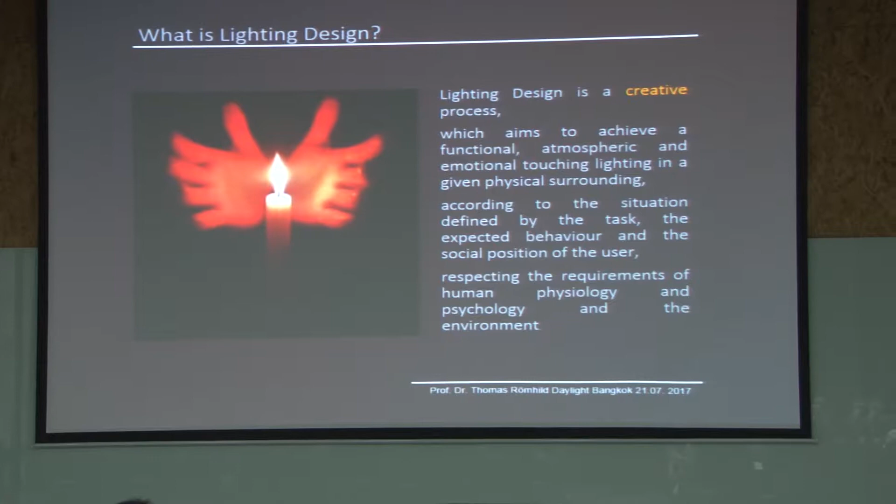Okay, the lighting design process. What is lighting design? It is difficult to find a definition for lighting design. So I was thinking how to do that, and then I typed very quickly some aspects about it. Lighting design is a creative process which aims to achieve a functional, atmospheric and emotionally touching lighting in a given physical surrounding - architecture lighting design - according to the situation defined by the task, the expected behavior and the social position of the user, and respecting the requirements of human physiology and psychology and the environment. So I think this shows the complexity of lighting design.

It's not a simple thing you can add in the architectural design process in a small slot between planning and realization. It is something which should go through the whole planning process. The lighting design is something which covers, as architecture, all the scales of the design process.

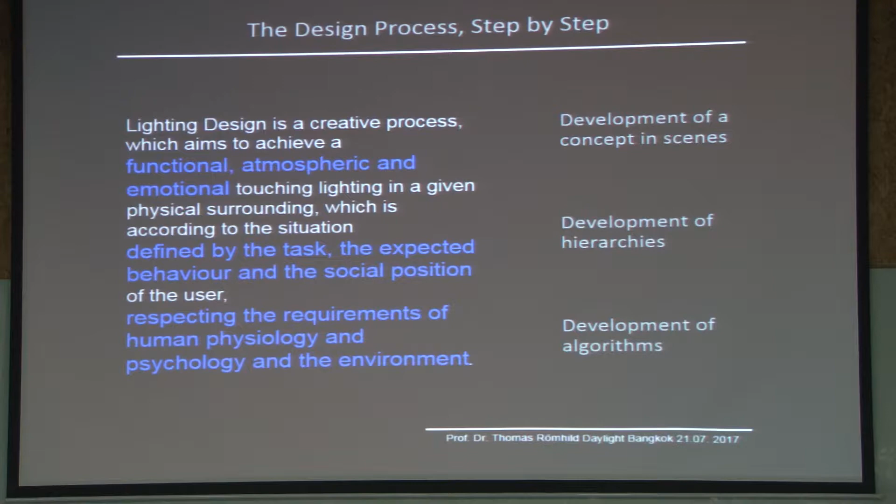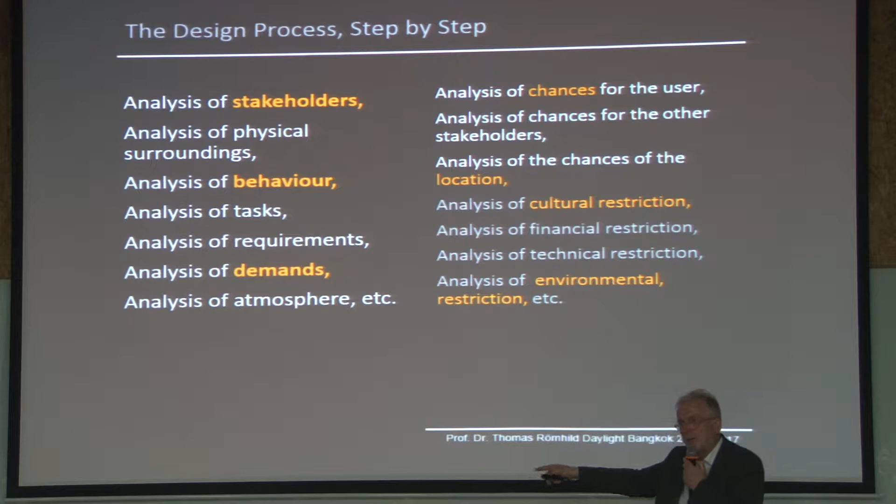We are doing this work, and that's why Professor Archer asked me to start with this. We are doing these thoughts in a European research project called Dynamic Light, where we are trying to find out how the lighting design process could be structured, so that lighting designers could develop dynamic, changing situations, also for the public. For the interior, we know it in a way like we have done here, by switching off the light in front and leaving it on at the end. But in the exterior, in public space, you can't do it. You can't go out and switch off, then come and switch on your street lighting. This is, I think, only possible in very few situations.

So we are trying to develop a process for lighting designers to develop this, and also for the cities, for the responsible persons, to find a way to describe which requirements the lighting designers will have to fulfill. Therefore, we were talking about a long list of analyses that should be done for every lighting design concept.

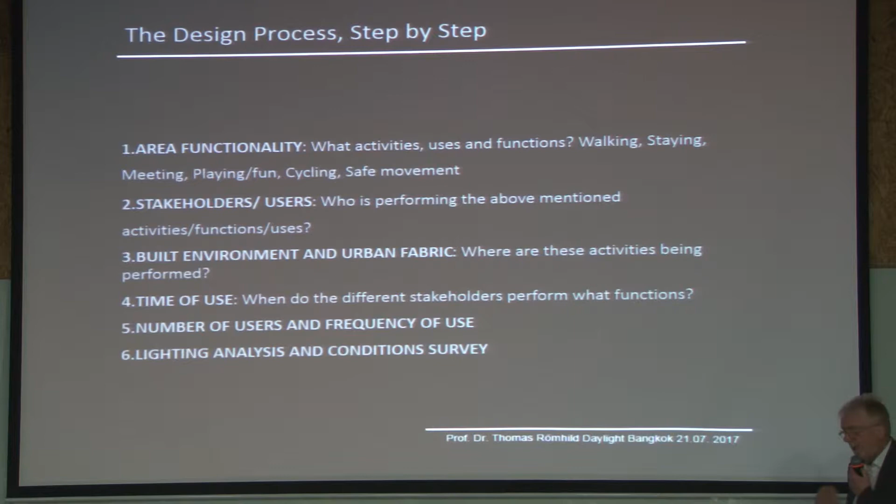And for making this analysis, you need data. For this data, we developed a monitoring tool. These are the main questions you have to ask if you are trying to develop a dynamic concept for public lighting. Working on this made me think it could also be good to develop a process for lighting design in general, because lighting design is different from architecture design.

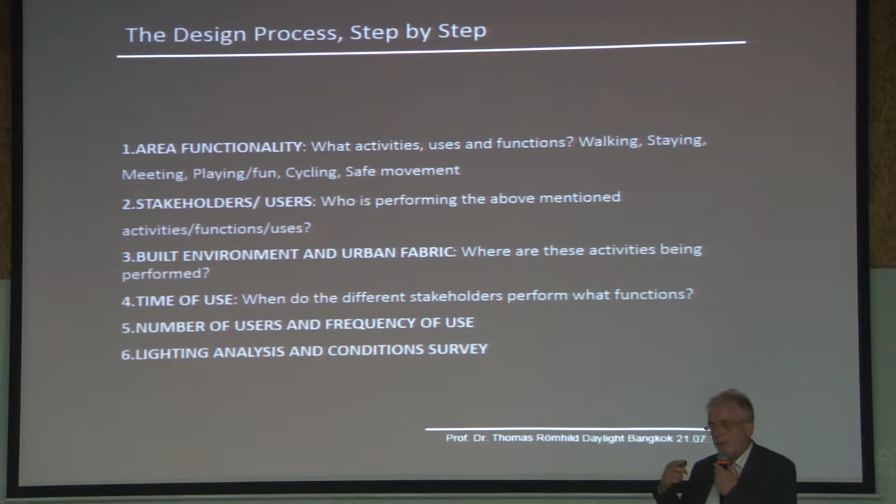As I said to the students a few minutes before, if you are designing architecture, you are designing something which is there. So you are designing a construction where you have to think that it is not falling down, and then this construction can wait till the users are coming.

If you are designing light, it is something that has to be consumed immediately, because light which is not perceived, not seen, is not existing. It is gone, it is wasted. So if you are lighting up an empty room, the light is there, it costs energy, but it is not seen, so it is not reality, because light has to be consumed immediately.

So it is better to have a room which is not used, not lit, than having light which is not used, which is also not waiting for a user, which is only there randomly.

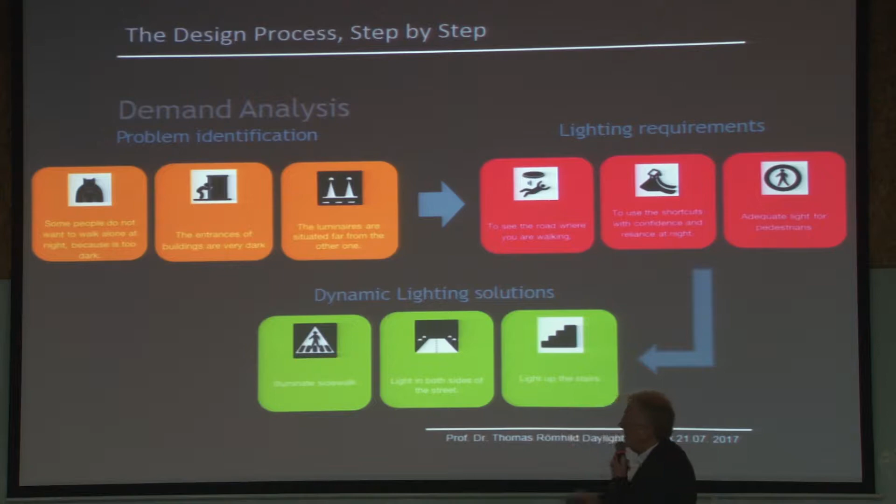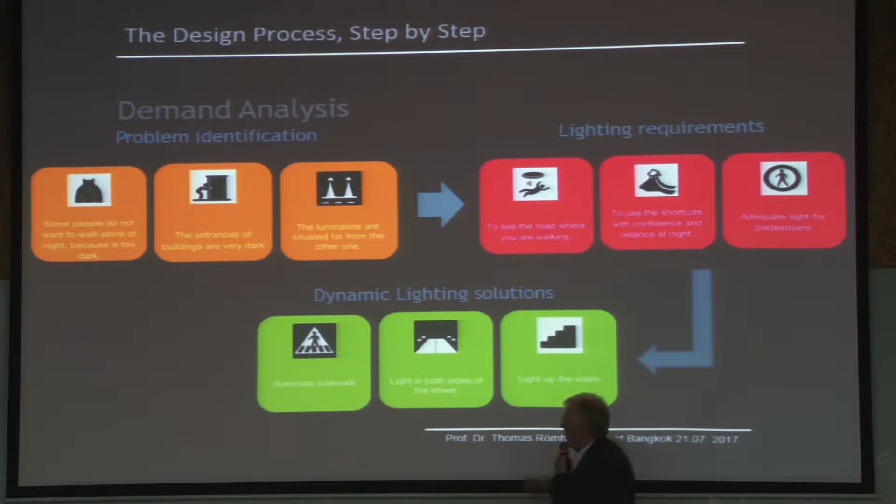For that you have to look very closely at what people are doing and what they expect from this scenery. For example, some people do not want to walk alone at night because it's too dark, so we have to develop a solution where we can see the road where people are walking so they don't fall. Therefore we need, for example, light on both sides of the street or an illuminated sidewalk, so we have a clear way of monitoring the situation, understanding what the stakeholders are doing, finding out the requirements, and in the end finding the light solution.

So this is where we are now, and we are continuing to develop this in our research project so that it is more simple, more handleable later on. Right now it's a little complex and complicated, and we're trying to make it more simple and understandable, so that a lighting designer and also the authorities have a platform to talk and understand each other.

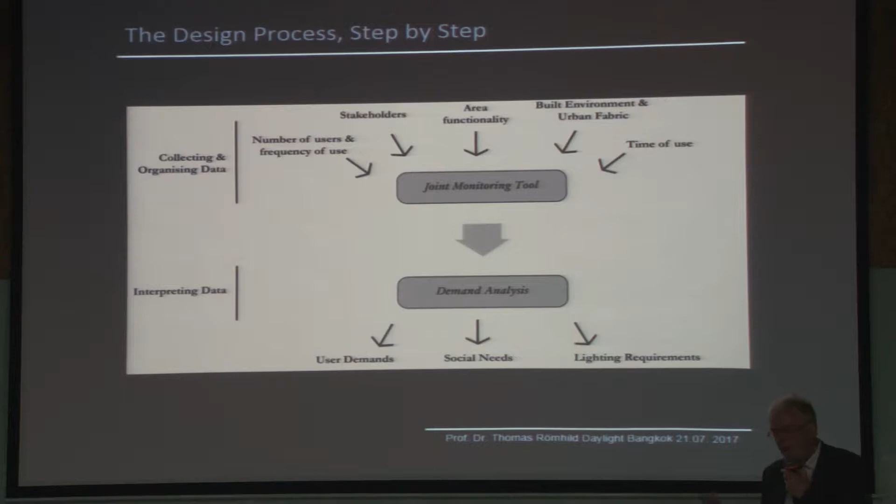Because we feel that this doesn't exist yet, and it's needed for complex design tasks like dynamic lighting. If you have different lighting moods you want to create, you also have to think about the reasons to change them, the algorithm.

Now let's come to daylight. Having this long starting period in mind about the design process, what does it mean also for daylight? Daylight is fantastic. Daylight is something which is changing, which is everywhere in a different situation.

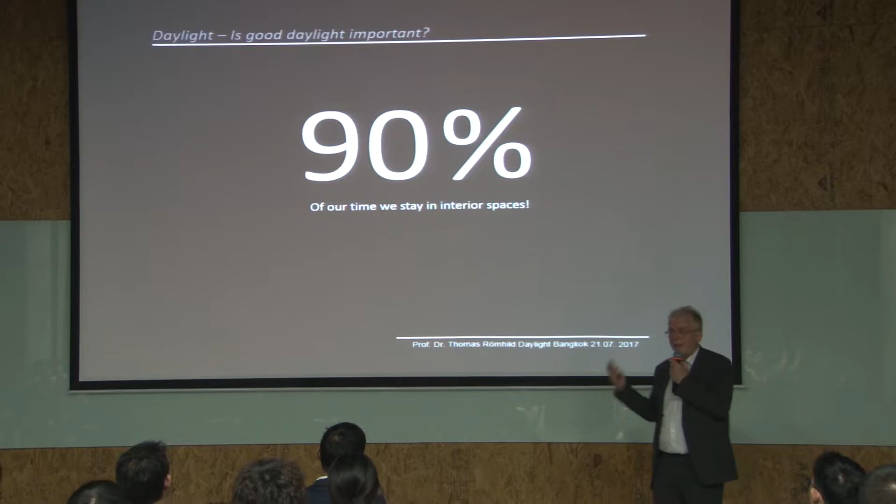80% of our perception is visual. 90% of our time we stay inside a room. What does that mean? If we are designing the lighting for a room, daylight is very important, because mainly we are inside, and if we want to use the daylight - and we will come to the reasons why - then it is needed to do this also for interiors.

So a good interior design does not mean only artificial lighting design. Good lighting design for interiors automatically means also a good daylight design. If we leave it to the architects, very often the solution is driven by the form of the facade, but it does not respect the differentiated, changing daylight. It also does not respect the physics that daylight has.

And so I will go a little bit through these things which might not be new for you, but maybe it is inspiring to get it all together.

Daylight is changing everywhere, every minute, every second, and it is so different. You have direct sun, you have diffuse sky, and with daylight, a good daylight design, you can make the architecture alive. The design of space is the design of light, meaning the design of daylight mainly.

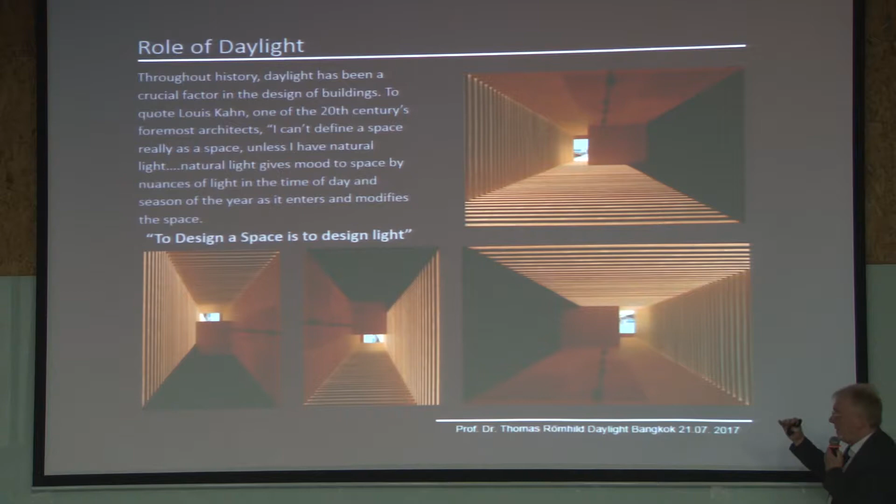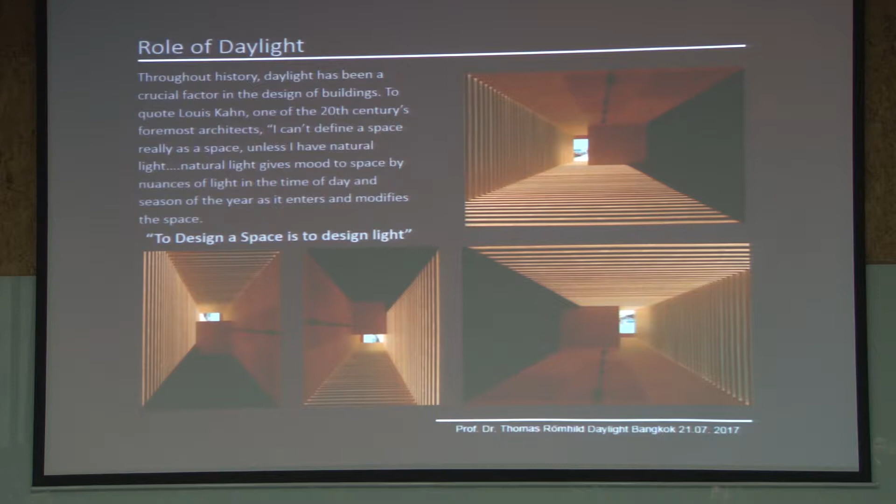And if you look at these pictures, you've already seen it's the same picture every time. But thinking about where the light is coming from gives you a different illusion every time of how the room is meant - what is floor, what is ceiling, whether it's an artificial light direction or a direction coming from natural daylight.

So for designing daylight, we also have to understand the design process, and we have a similar design process as I mentioned already. Here we also have in the beginning the monitoring, the degree of daylight utilization - what is given from the architecture, what can we do? And then we have the demand analysis - we look at what daylight is needed and how we could combine what is given with what is needed.

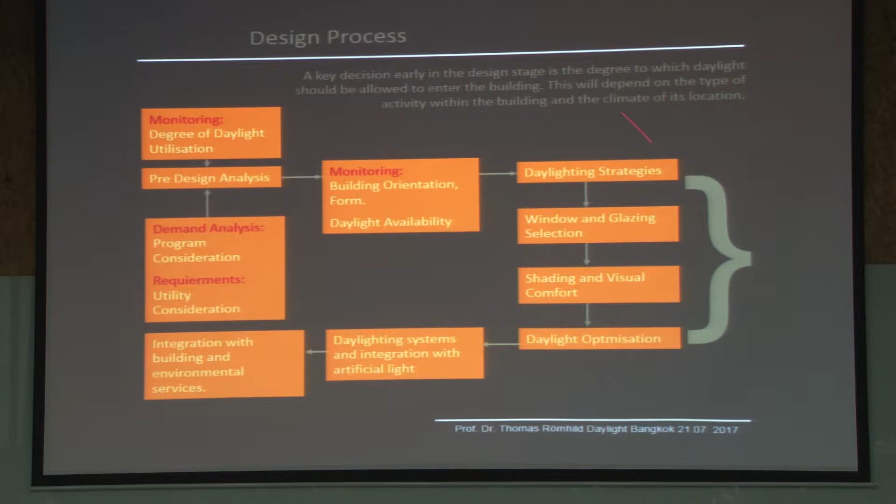And there is the pre-design for the daylight. Then we look more in detail at the building orientation, the form of the building, the daylight availability, and then we put all this together developing a strategy, deciding about windows and glazing, shading and visual comfort, and then we optimize and go back to the daylight systems if needed, integrating all this into the building service or the building itself.

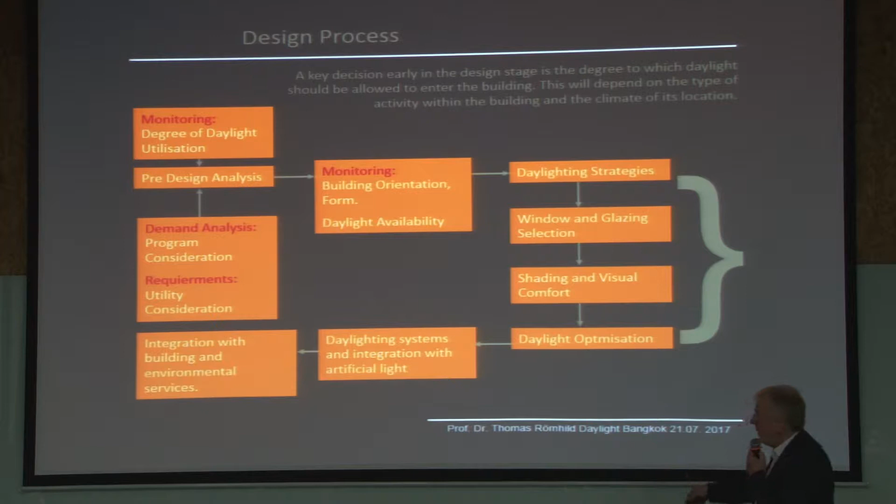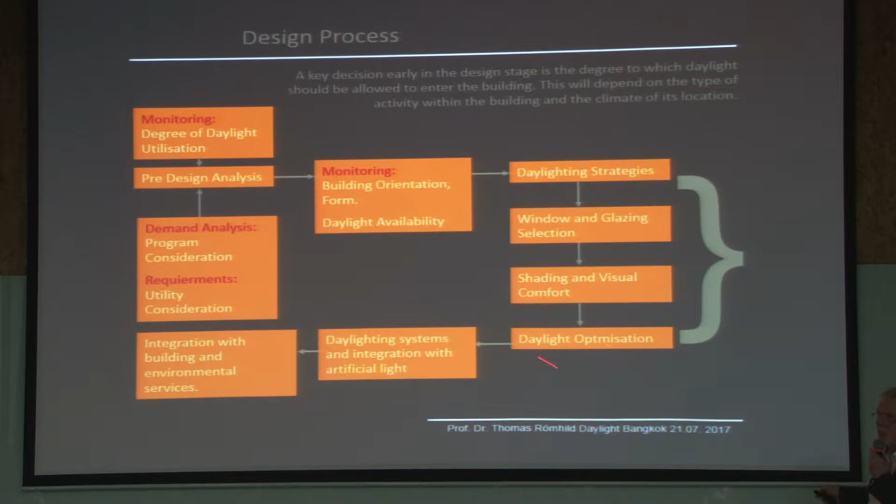So it is a long way, this daylight design, and as you can see, normally it's somewhere here that you have given windows, not selected windows. You may give a comment on the glazing, and then you have problems, and then you can decide about the shading systems maybe, and how this could be integrated into a developed artificial light concept.

I think it is needed to start at the real beginning if you're talking about daylight, during the whole process of architecture development, and we should think about what the end will be. The end will be a comfortable atmosphere with low energy costs.

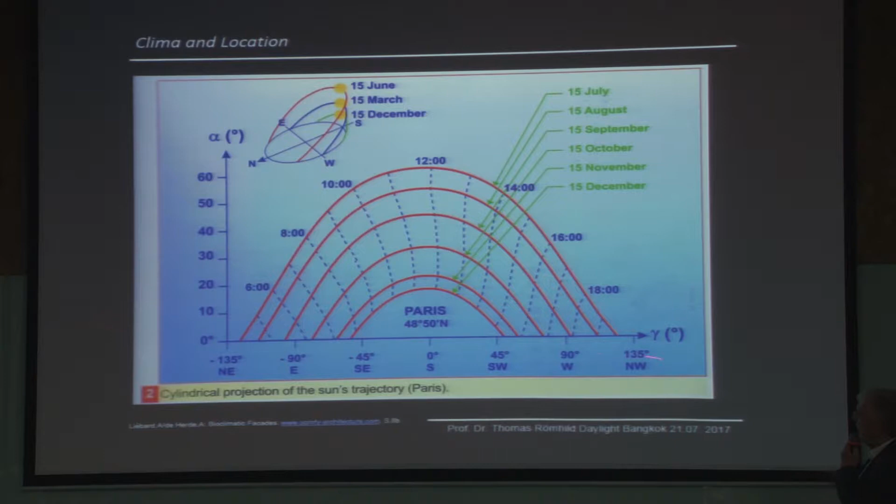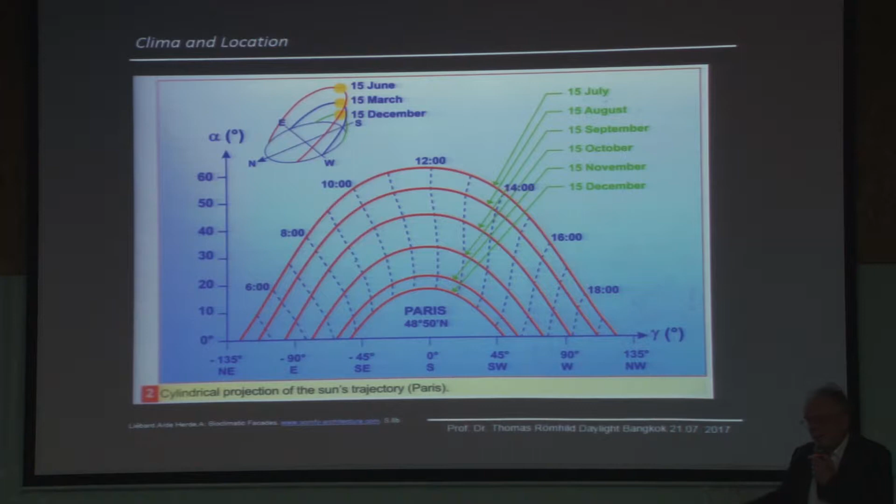of the city or situation where you want to talk about, and then you can see the month lines and the hour lines, and you can find the exact sun position, talking about the azimuth and altitude. I think this is an easy thing, and if you know that daylighting and sun position is something so easy, then it is also easy to respect it when planning a building, as you are also respecting the width of the area where you are doing the building.

This very simple form, this very simple connection, brings so many different results that it is possible, if you have an open eye for the beauty of daylight, to find everywhere, every time, new signs of this beautiful thing.

And to get this information, which is given by the natural light, into a building - I think this is a task, because daylight gives us unconsciously the security about our physical surroundings. Daylight tells us what the weather is, what the season is, what the location is, what time of day it is.

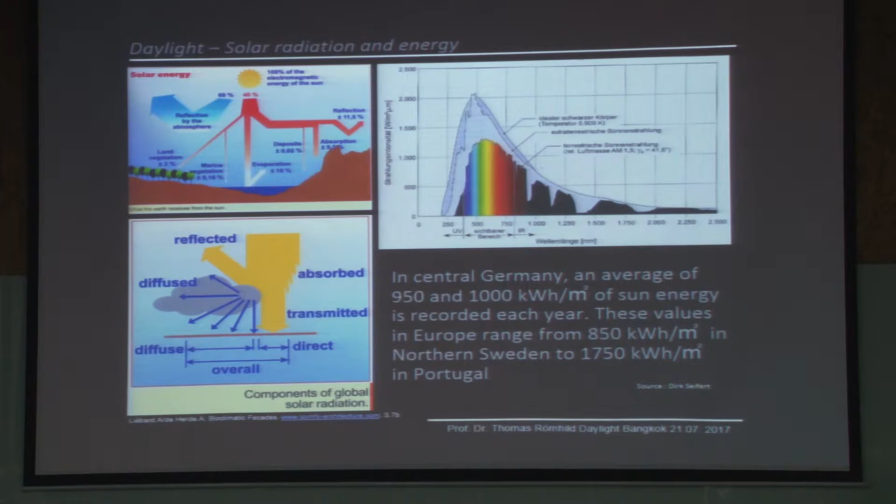But daylight is not a simple thing. Daylight causes problems too. We all know that daylight, as it comes to the Earth, is filtered, and only part of the daylight reaches the Earth. All of this brings energy to the Earth, and this is absorbed, this is reflected, and if it is absorbed inside the building, then it is heating up the building.

I think this is a very common thing here in Bangkok - you know that if you have a big window and a lot of sunlight or daylight coming in, it heats up because it's energy when absorbed. So you can see it here - this is the energy, not luxes or something lighting designers talk about. This is the energy in watts per square meter in the daylight, shown here according to frequencies, according to the spectral aspects.

And you can see the visible part, shown here colorfully. This visible part is as big as, or bigger than, the part which is not visible. So if we let the visible light in and the infrared light is not coming through the glass, or is reduced coming through the glass, then we will still have an energy problem. So if we have glass that reduces both the visible part and the infrared part, it might be best - but why is the window so big? These are questions we will think about further on.

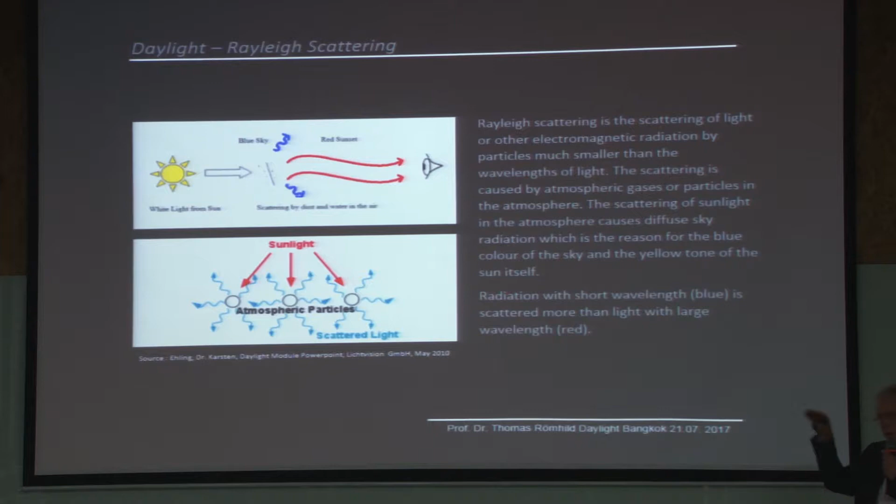In the sky there are a lot of very small particles, and these particles are scattering the daylight. Because they are so small, they scatter only the blue wavelengths, and that's why the sky is blue. When there is a cloud, the particles are bigger, and they scatter a bigger part of the spectrum, so the clouds appear white.

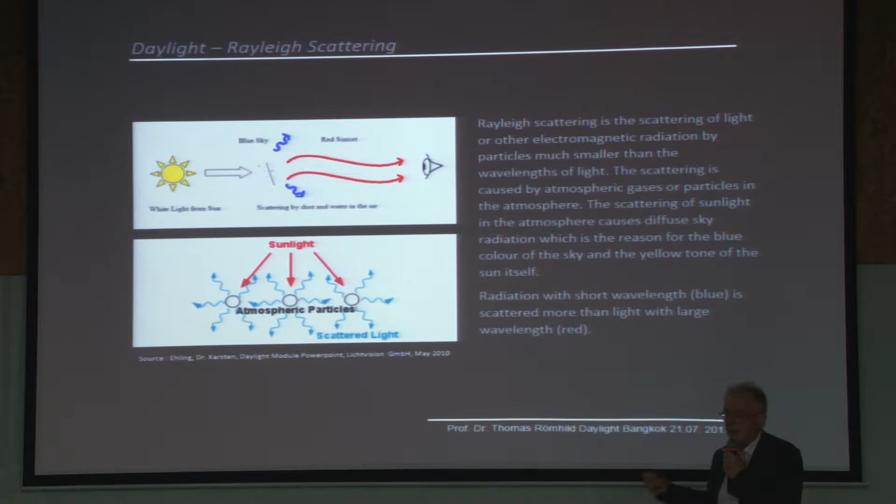So it is a very easy thing, but it is also interesting to know, because this is producing the information that we are reading to understand our surroundings.

Because if the sun is very low, the way of the light through the atmosphere is longer, and also the particles it passes are more numerous, so the red light comes through while the blue light, and maybe the rest of the spectrum, is absorbed. This makes a difference to what I said before.

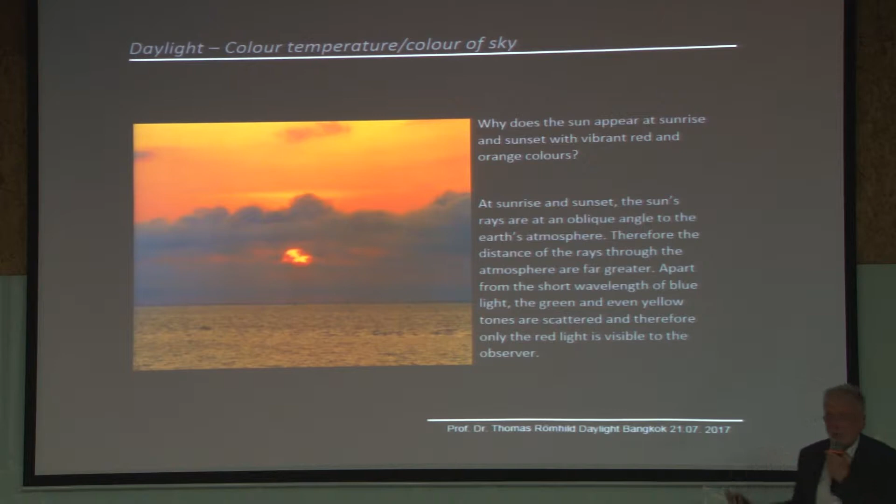If the sky is blue, it's because some of the blue parts are scattered and the rest is going through, so we have the full spectrum with a little bit less blue—but blue, as we have seen before, is a lot in the natural light.

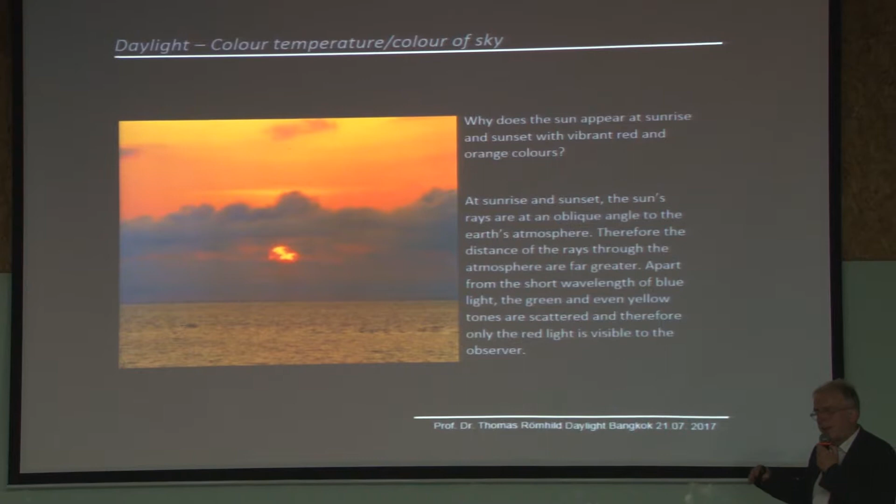So we have all the white light, the full spectrum, coming down. But in the evening, the blue light and the green light are absorbed by the atmosphere, so this sunlight is really red.

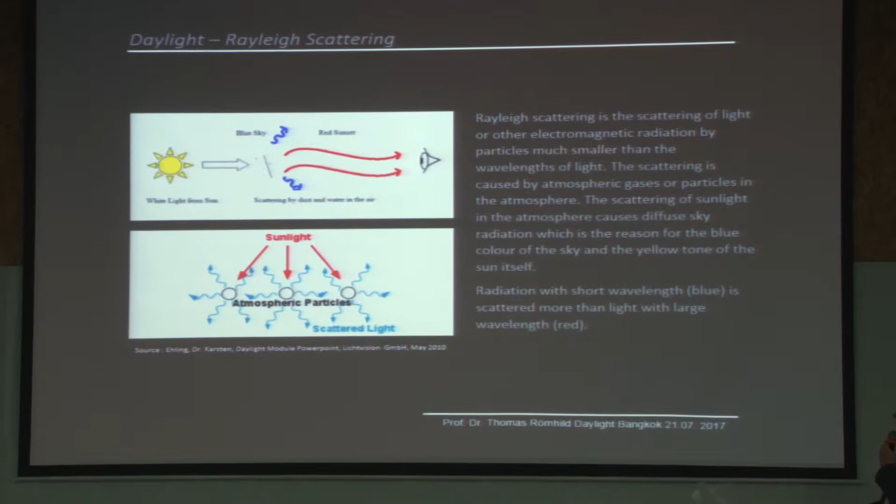We saw it in the reflection on the sand we looked at before. The yellowish part, the orange part—there the blue parts of the light are already absorbed. You can see this here with the blue light first, and then with the red sunset in the picture above.

This was the wrong direction, that's why I was talking about the same slide again. So this red light is really red light, and everything looks much more reddish than by day.

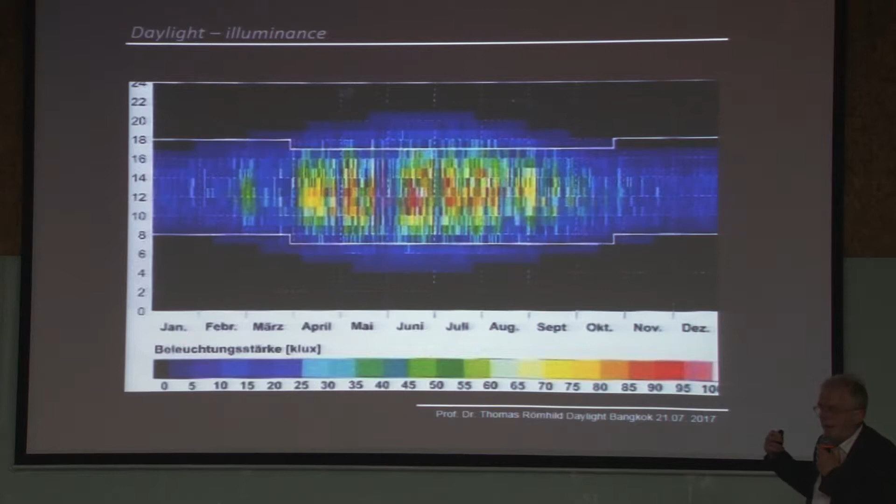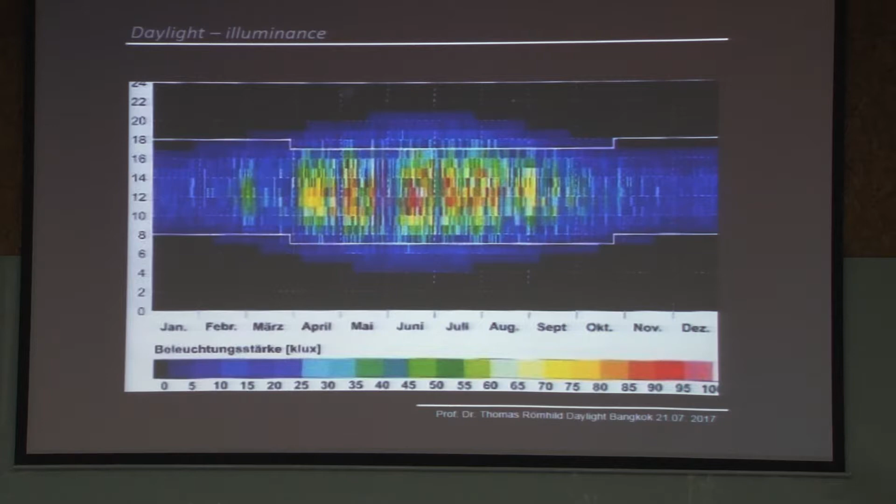But what does this differentiated light distribution mean for us? It means that if we want daylight in a room to be somehow stable, like artificial light is, we need a system that controls the daylight, taking away more when it's very bright—because of direct sun, a different month, or noontime. Many different lux levels come into the room, and if we want stability, we have to make changes with shading systems or window systems.

This chapter is about physiology and psychology, and it will be a short one because I don't want to talk in front of lighting designers about the seeing process. I'll only mention two things because they're important. One is that the luminances and illuminances we find outside are incredibly high.

What we think is bright and what we think is less bright has something to do with where it is. Is it a light inside? Is it the direct sun, which we shouldn't look at? Is it a cloud, which has about 8,000 candela per square meter? Or is it the sun itself, which is something like 1,000 million candela per square meter?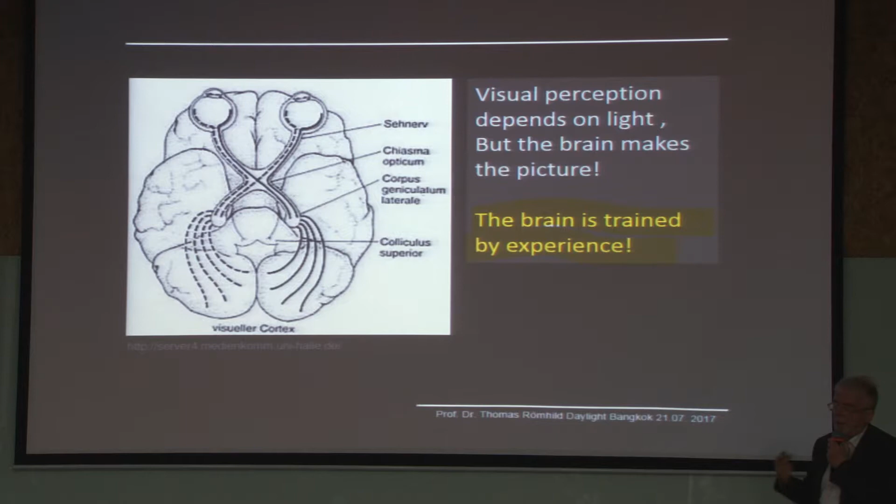The other point is that we've learned how daylight behaves—so we all know daylight in the evening is orange, but we don't really see the orange. We might notice it in the first moment when we come outside, but after a while it's gone. This is called constancy of perception, and it's important if we're trying to work with the beauty of daylight and develop it. But it's also important that we respect the natural way nature treats daylight, which is why I'm talking so much about it.

What we remember from a situation is also very much inspired by what we see—by, let's say, the postcard view. So something we've seen as important and nice, we will also see and remember as important and nice. And then there's another process mainly inspired or driven by daylight.

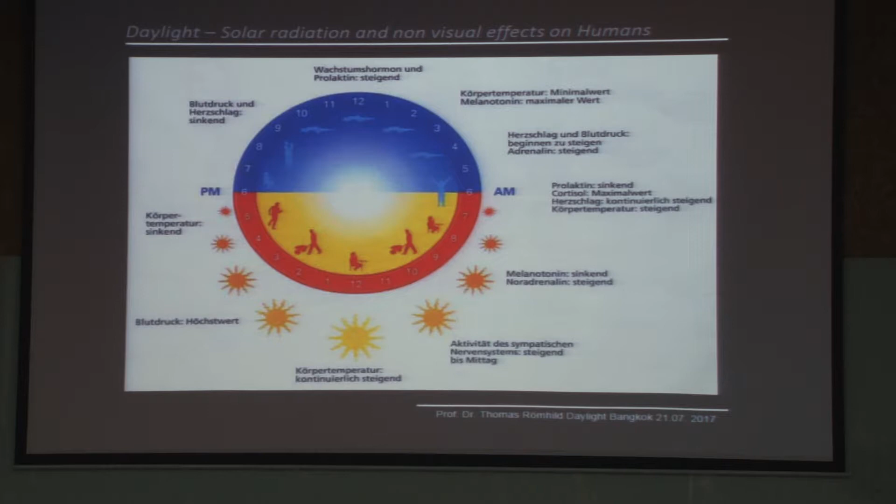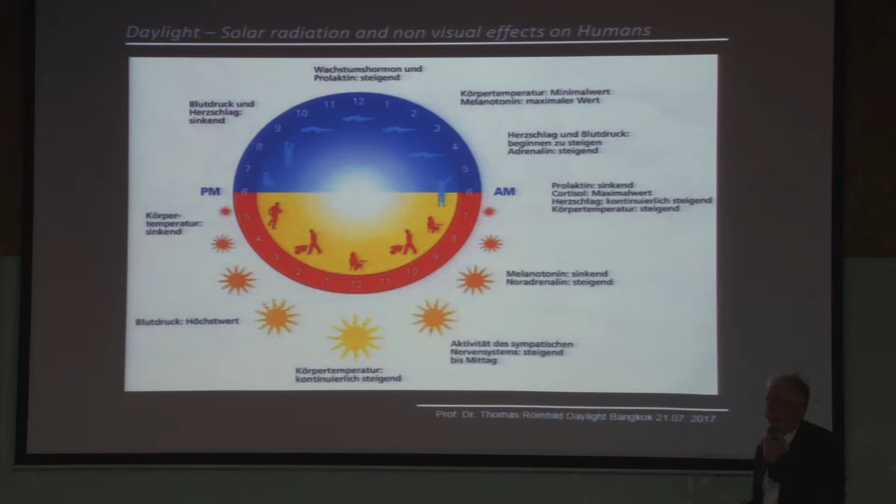This is our internal clock, and we know the internal clock is run by blue wavelengths. The body is regulated by the sun, and this is also done by daylight. If we have no daylight, our biological clock doesn't work properly. Science says we need about half an hour a day of bright daylight for it to work in a healthy way.

But daylight also has a cultural background—it affects the way we perceive situations and how we act. So daylight is also guiding how we act toward other people. And for daylight, the main principle is the principle of control and self-control.

I don't want to go further on this aspect. It will be another lecture, but if you are interested, this is something we can talk about later.

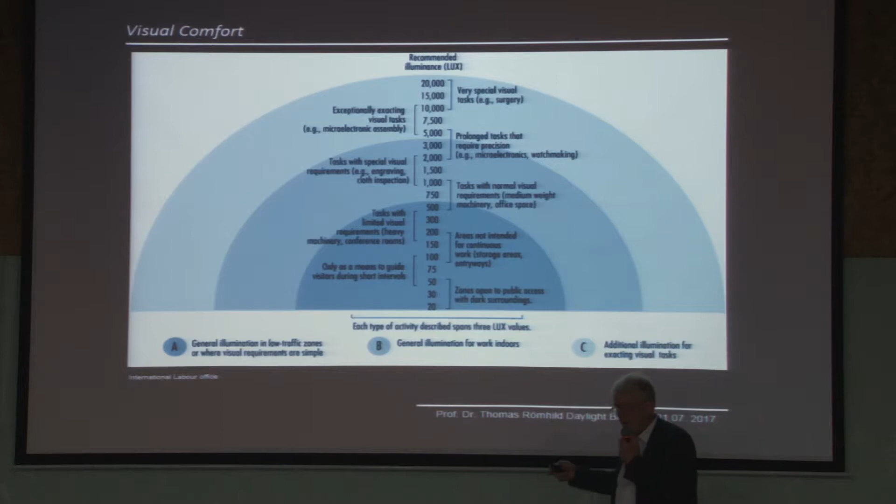Learning from the indoor climate and human comfort, first visual comfort. I don't want to talk so much about this because visual comfort in a room is described for artificial light. For daylight, it is mainly that we say it should be glare-free, meaning the luminance differences are not so high. So we should have a daylight distribution in a room which is more even, and there are not hot spots like direct sun shining in, so you can't see anything anymore.

I'll come a little bit to another point: thermal comfort, because thermal comfort is also depending on the daylight. We want to have a temperature of 36.7 degrees, and we have a lot of possibilities to make it possible that this temperature is the real one we want to have.

It is not only that we have air conditioning in a room, it is also that we have a lot of self-regulating systems in our body. But the sensation of heat, which is important for daylighting, depends not only on air temperature but also on surface temperature. If we have a cold surface, we feel that the whole situation, including the air temperature, is lower. If we have a warm surface, we feel that it is warmer.

In our country, we like to have a warm surface because we want to feel warmer. But how does this happen? The sun is shining directly on a wall and warming it up, or shining directly on the floor and warming it up. Here in this country, it might be much better to lead the sun or daylight into the room in a way that direct sunlight is not warming up a surface, and that the glass is not warming up because it's single glass with bronze color, which warms up a lot because it absorbs a lot of heat. You should think about possibilities to keep the surfaces cool, whereas in winter times we like surfaces which are warm, so we like it if the sun is coming deeply into the room.

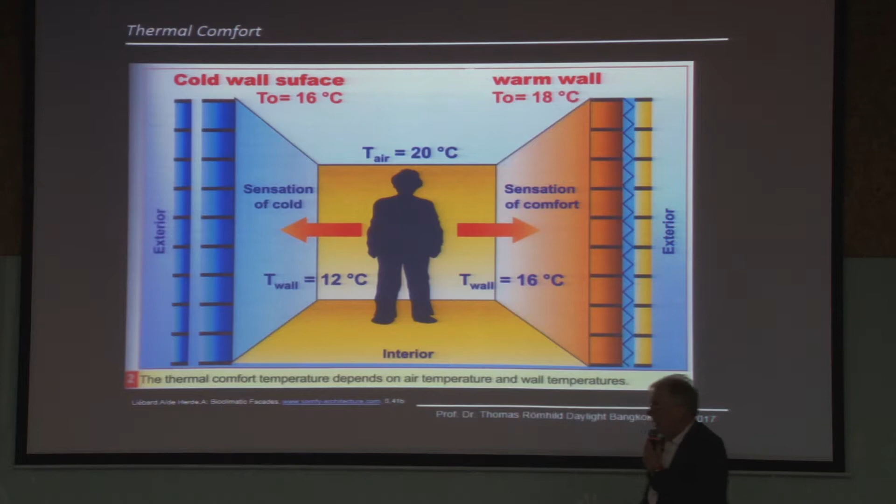So temperatures are really differentiated. Not everyone needs the same temperature. It is a very personal thing. So it makes no sense to have a fixed temperature. It is something where you have to have a dialogue with the people who are using the room.

Short cut. Now we were talking about the humans. Now we are talking about the building. How daylight comes into the building is defined by the daylight factor. I think you all know it. The daylight factor is something where you can compare different buildings, different rooms, according to how much light is coming into the room. So it's a percentage of the outdoor and indoor lighting.

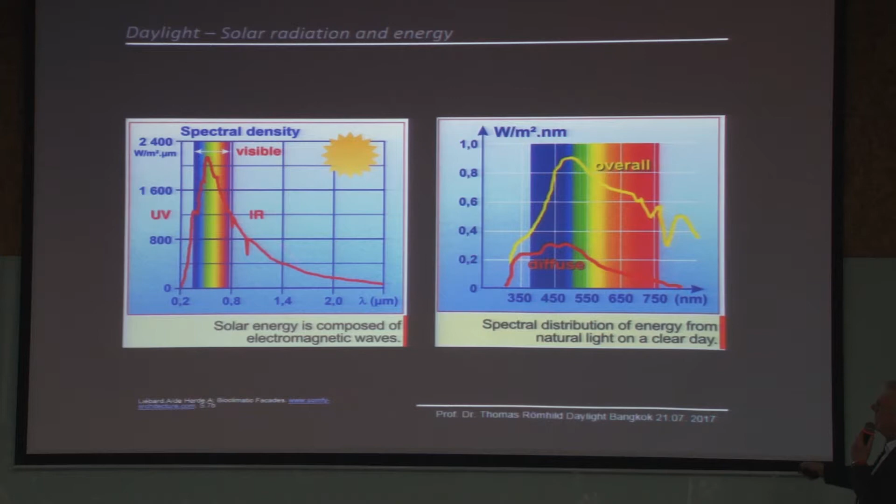This can be calculated, and there are a lot of factors which influence that. For us, interesting should be only the glazing, because if you look first at the windows and the light coming in, you can see again what I have already talked about, that there is a lot of energy, and here you can also see what I have already shown, that the diffuse sky has less energy and the direct sunlight is very powerful.

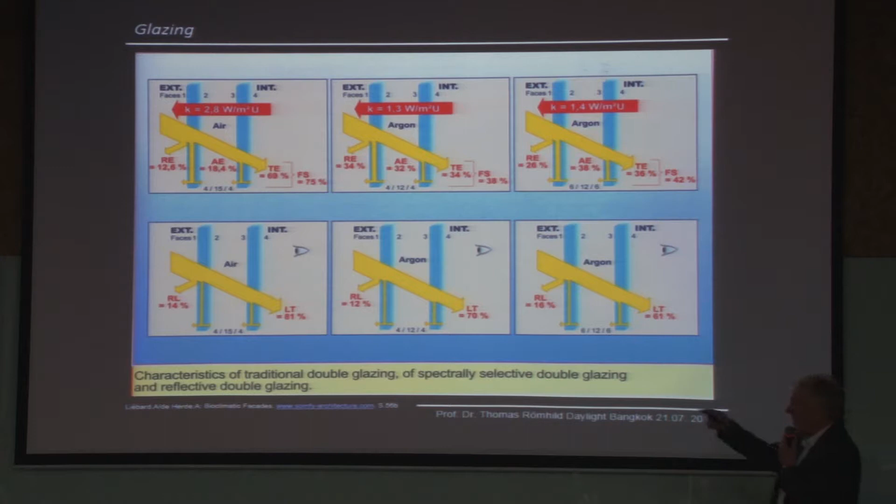Then let's come to the glazing. The glazing has different abilities, and what is interesting, as you all know, is that energy and light going through is reduced, and so on. If you have a single glazing, you would have a warming up of this glass, because it is absorbing the light, not only reflecting it, and the rest is going through. If you have a double glazing, you have this system twice, and this reduced energy, this reduced light is again a little bit absorbed, and it is warming up the glass.

If you have now a selective glass, it depends on the quality of the glass. It happens that the visible energy can go through, and the not-visible infrared energy can stay outside if it is a good glass. But it is not only reflected, it is also absorbed.

So it can happen if you're using reflective glass, especially only single glazing, which you can see more often here in Thailand, that you get a heater in your room because you get a hot glass. And the hot glass works like a heater, heated up by the absorbed energy. So the heat does not stay outside if you have a glass which is more absorbing the energy than reflecting it.

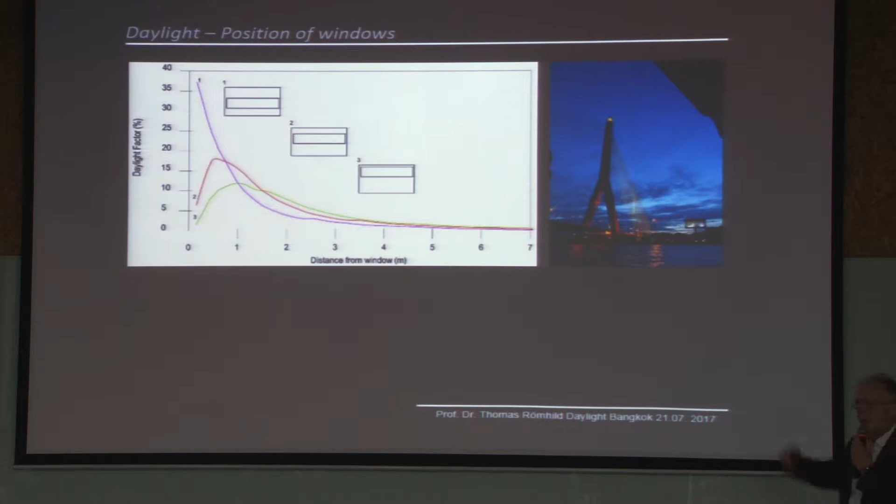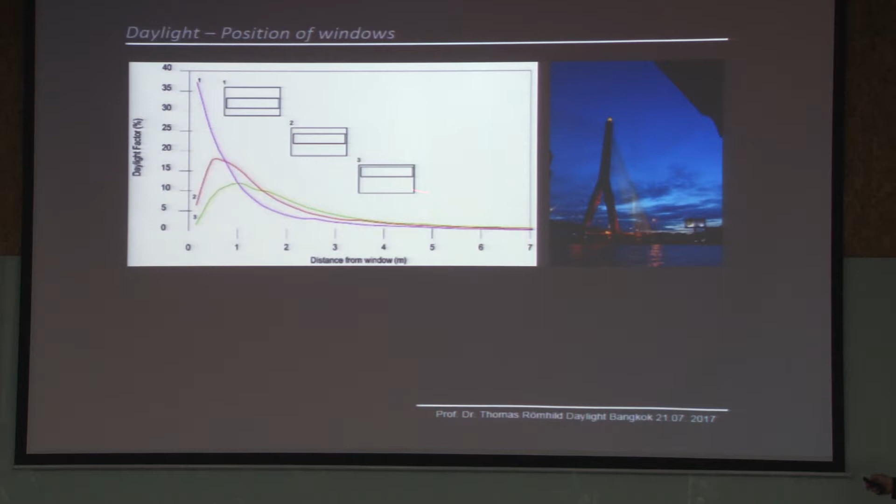Another thing which is important for the quality of daylighting is how deep the daylight is coming into a room, and therefore it is important where the window is. A simple rule: the higher the window is, the better the daylight distribution in the room. But if the window is very high, you have a problem that you can't look out and see the beauty of the city. So I think the best is a combination, having a smaller part to look out and a wider part for getting light into the room.

Why I'm talking about the width and dimension of the window - I made this picture and measurements in my hotel room now, preparing this lecture. I found that if there was only a little bit of the window open, less than 10 centimeters, I already had, at 2 meters distance, 50 lux. And this 10 centimeters, it's diffuse sky outside, not very bright.

These 10 centimeters are enough to light up the room in a way that I was happy with, so only a little bit of energy is coming into the room. If I have it nearly 80 centimeters open, then it is 300 lux at 2 meters distance, and this is enough for having a working area. So you can work in this room with just this small slit of light, and low energy is coming in.

If I'm opening the window nearly half, it is already 1000 lux. And if it is really open, it is 2000 lux. And now it's a hotel room - the whole day the window is open like that, because the service opens it, and the heat is coming in.

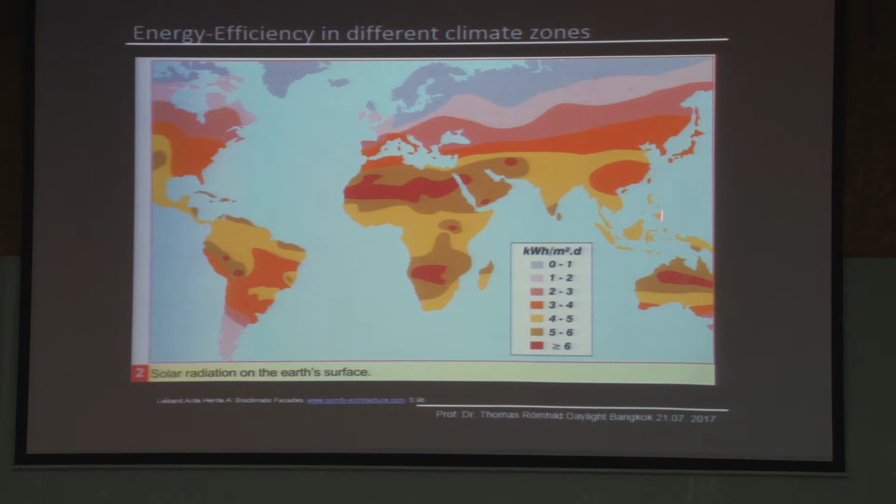Here is the Baltic Sea. It is not so much. We are happy in summer, and in winter it is cold. And where we are here, it is also not the hottest area, but it is really hot.

So also the sun path is different, which makes it more difficult to deal with the sunlight in the northern part, because the sun position is changing a lot from north to south, northwest, northeast to south, and the sun height is also changing a lot. So we have times of the year where the sun is very low, and times of the year where the sun is higher.

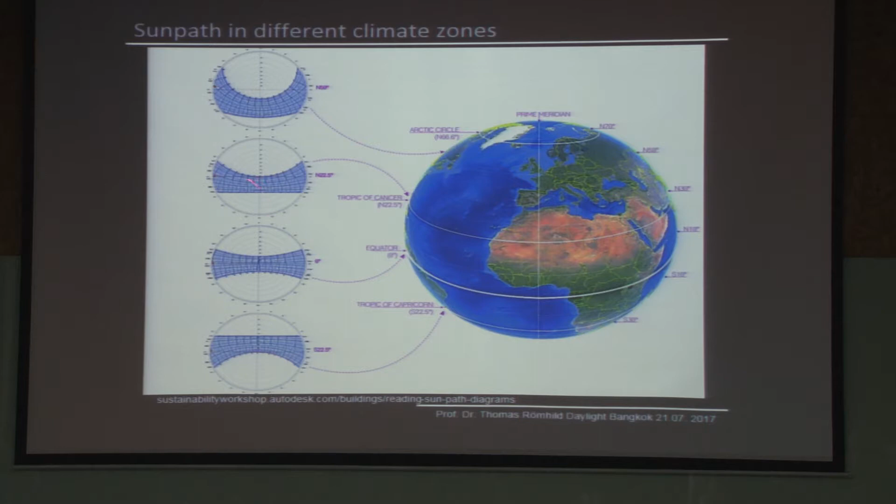And we have it here. I think these are all well-known things, how this works.

If we are now talking about high-rise buildings, this is one in Bangkok as an example. The difference is that in Bangkok, every evening it is nearly the same time when it's getting dark, and every morning it's nearly the same time when it's getting bright.

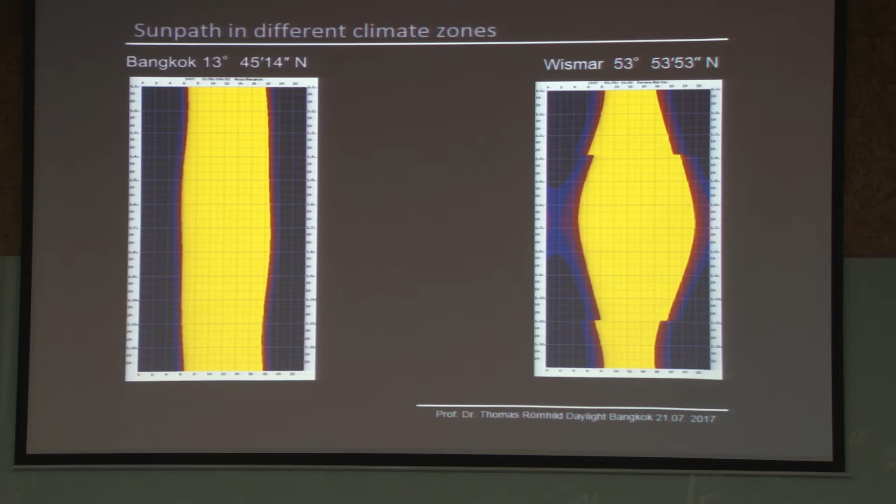And here in Wismar we have a big difference. In summer it is more or less bright the whole night, and in winter there's only a short period of daylight. This has something to do with the time where daylight could be sufficient.

In our region, 80% of the annual working time we can work by daylight, and 20% we need artificial light. Here in Bangkok it might be easier. You have rush hours, you want to meet the rush hours, but if you are going in the morning to work and coming back in the evening, you have more or less the whole time the chance to use the daylight.

This means, if this is research recently done by a research team in the Netherlands, it's a calculation, not a measurement, they calculated the same buildings in three different positions: Amsterdam, because it's the Netherlands, Sydney, and Singapore.

You can see the interior lighting needed in Singapore is only 5%, because they know exactly when it is dark and when it is light in the morning. In Sydney it is a little bit more, 9%, and in Amsterdam, which is in the north with these high differences in day length, it is 11%.

You can also see a little bit of heating is needed, but also a lot of cooling, because there is a lot of internal warmth. In Sydney and Singapore you have no heating, but you have cooling, and in Singapore it's the most. So nothing astonishing.

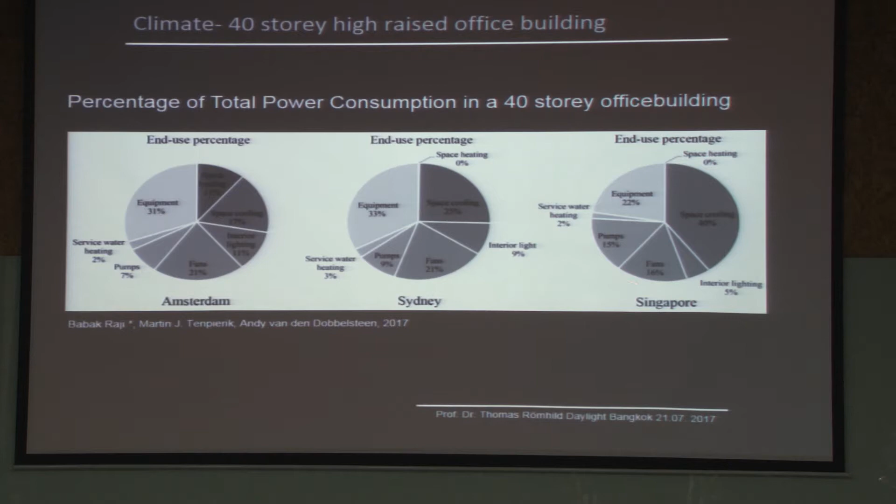If it comes to building type, normally you'd say the building with the lowest outer walls, or smallest facade, has the smallest possibility that warmth or cold air, or energy, could leave or enter the building. So a round building is marked as the one which seems to have an ideal form.

But they calculated that in Amsterdam it would be better to have an oval building, because this oval building could be better oriented in a direction that makes better use of the sun.

And then you can see the different buildings, and the worst building is the one which is very often used in Europe for high-rise buildings, this form, because it allows a smart stair system.

And then you have the same analysis for Sydney. You see some small differences, but it's more or less the same, just in the other direction because it's on the southern hemisphere. Here's Singapore again in that direction. You can see first changes, but the energy consumption depends a lot on the form of the building.

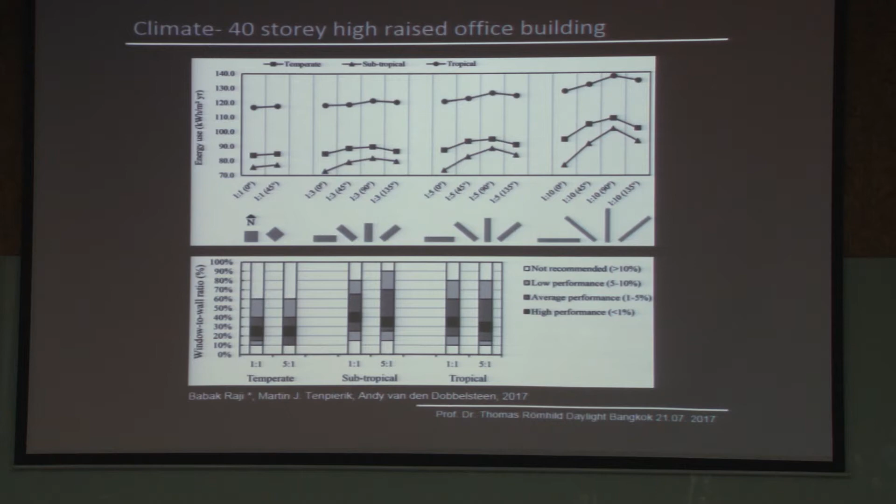In the tropical region, but we never have, it is not recommended, what we can very often see, an 80 to 90% wall-window ratio. So what we are doing really is building too big windows. We don't need so much daylight, we don't need so much energy in a room.

Here you can see it according to the different directions, and the deep plan, this is the squared building you see in the temperate region. There is not such a big difference, but east and west is not so recommended, it is doubling the energy use.

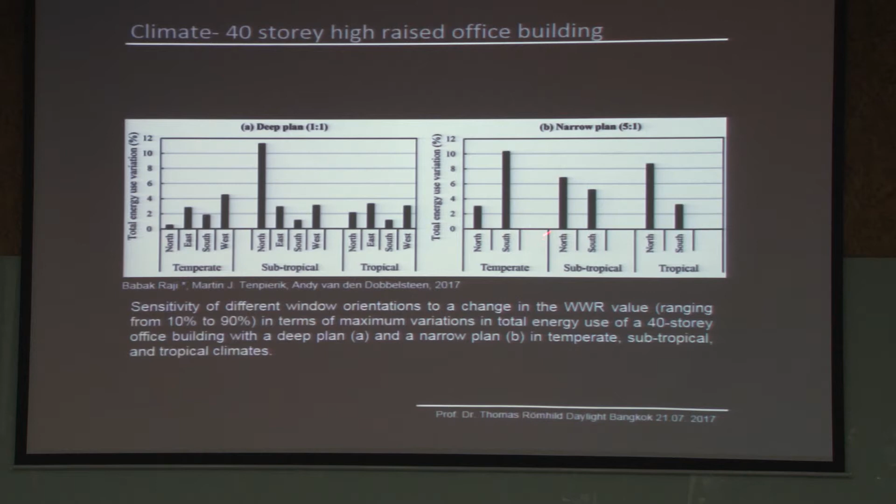In the subtropical, if you have windows to the north, it's a problem, because the sun is coming in really, and in the tropical there's also a difference. If it is oriented to the south, it is the best, and if oriented east-west, it is not so good. For the narrow plan building, you have really big differences depending on direction, north or south, in every region. In the subtropical, a little bit less than in the tropical.

What does this mean? In a temperate region, to the east and west, no or very low glazing is useful. Most glazing should be average to the south, and a big window, no - it depends, it doesn't really matter what it will be to the north.

Coming to the tropical region, again no glazing to the east and west, and to the south 10 to 55%, and to the north 10 to 35%. So it is a really low part of the facade which should be glazed to have a recommended wall-window ratio for low energy consumption. This is somehow a worldwide summary of what I said.

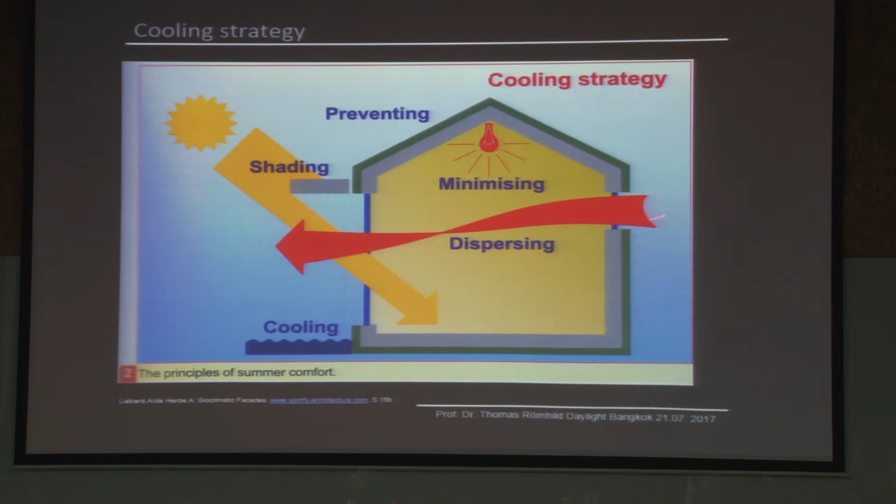The cooling strategy is minimizing artificial lighting, because this brings heat into a building, preventing heat from coming in or going out, having shading which stops direct sun, because direct sun has more than double the energy of diffuse light. And also having some natural cooling ideas and ventilation.

Because if the direct sun is coming into a room, it's heating up a surface, or also the diffuse sky is heating up the surface, this surface has to be cooled down during the night. This is what we try in Europe, so that it can catch energy again afterwards.

But here it is not so appropriate because the temperature differences are not so big. So you can get rid of this overheating only by mechanical things, or by wind, or by other things which could cool. So it's very important that we get an appropriate amount of energy into the room, and therefore you can find a lot of systems.

These systems, which are now used, are mainly changing the architecture a lot. Architects are taking them now as a design tool, but I think it would also be interesting to think about where to direct the building, how big the windows should be, where the window should be in the facade, and whether there is a simple system to work with that.

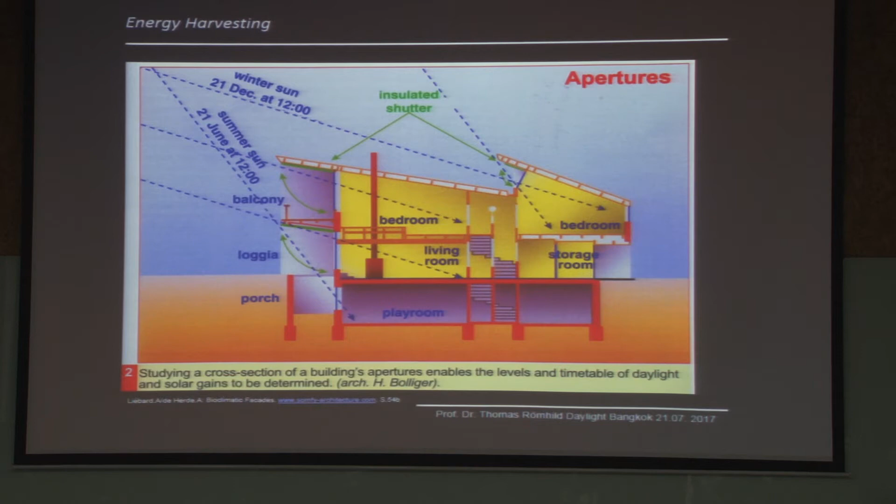So this is for the European country, the ideal house where everything is thought about - how to get light and sunlight deep into the building in winter times, how to have shading during summer times. This type of building is used sometimes, not very often, and these are ideal things for the European area where you want it open, but it could also work here because it has shading possibilities to the south, and the south, where the sun is also in its highest position, is a possibility for very easy shading by an overhang.

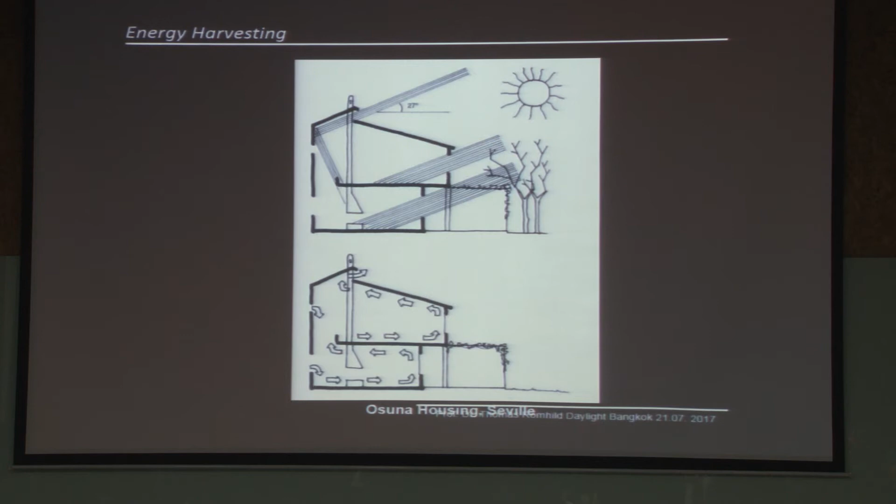This is then the winter idea, to get energy in to warm up the houses, and then how to distribute this heat in the house is also interesting, to have a ventilation system.

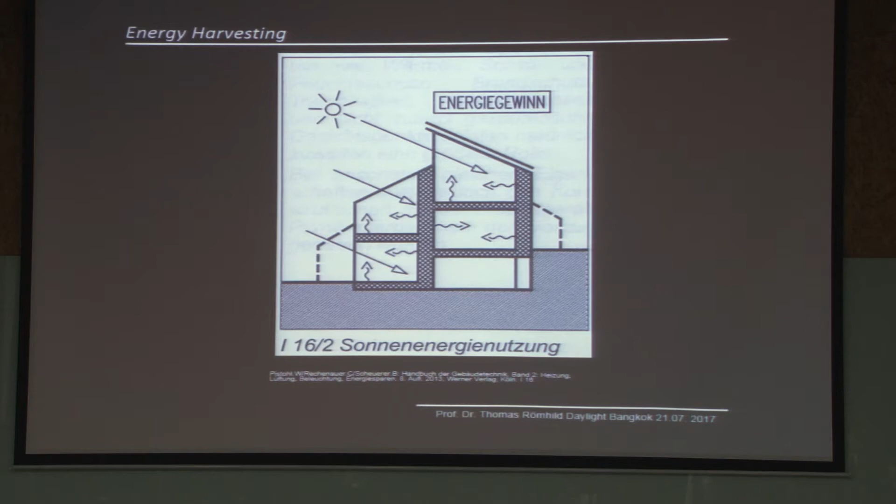This is how you can use sun energy as I described: it's important that this wall is hotter than the air, so the wall can give heat to the air. If it's at the same level, it's not working. It has to be heated up during the day, let's say to 28 degrees, and then it can give the energy into the room during the night.

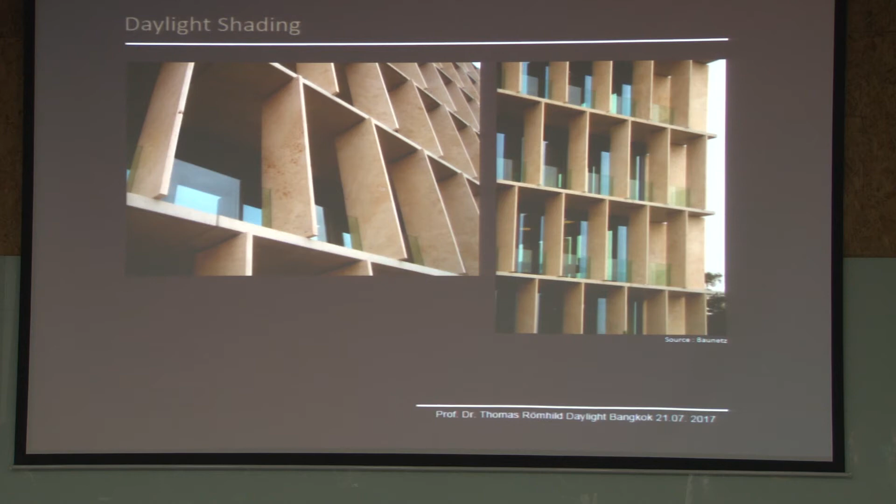We can also change the building very much by having shading ideas, by integrating it into the building, or by having something hanging in front. Here you see the architecture influencing this, because it's the west side and they wanted light and shadow even when the sun is deep. I think this is making a new building.

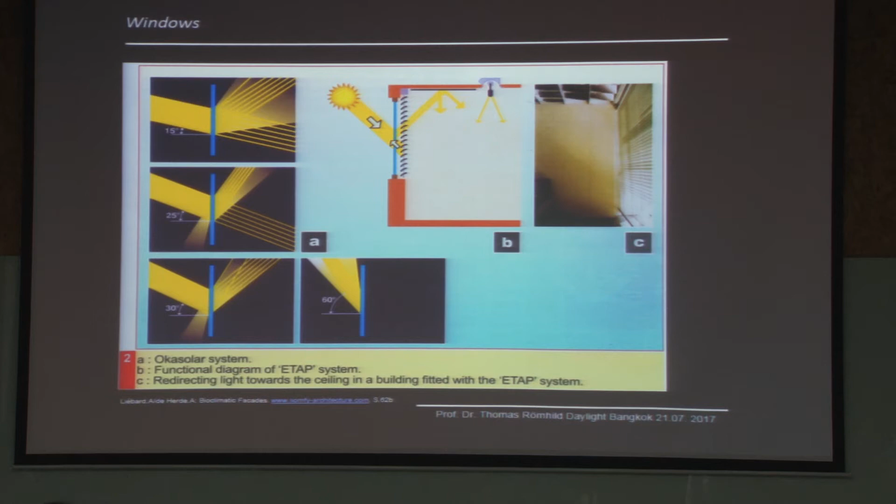Or you can use smaller devices like light direction systems which work prismatically, as shown here. Or it could be a prismatic louver from other producers, directing the light up to the ceiling so it comes back into the room and lights it up further into the depths.

There are a lot of systems. We developed this one 10 years ago, a holographic system, in our university together with the University of Dortmund. Unfortunately, we found it was not able to be brought to market - it's too expensive, and also the material is not available anymore.

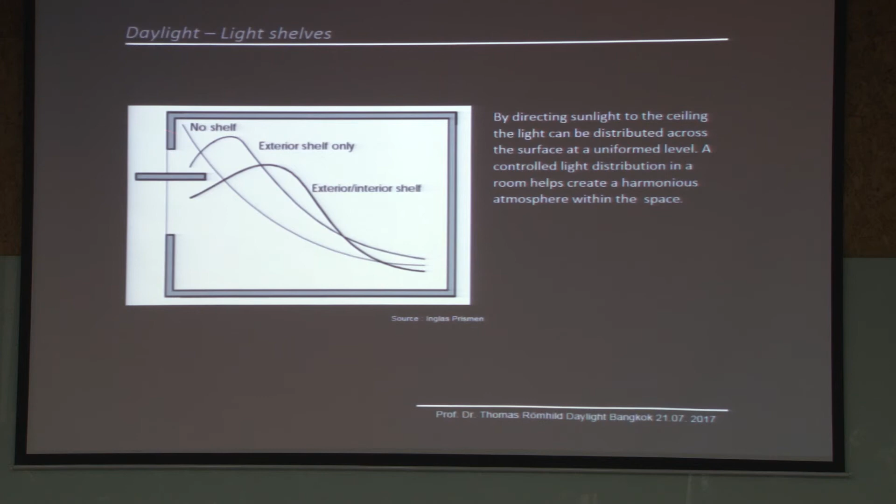Here you can see if you do something to the window to direct light to the ceiling, it also reduces the amount of light in the room. So you can't really do redirecting of light to make the room brighter - you can only bring a little bit more light into the back part of the room.

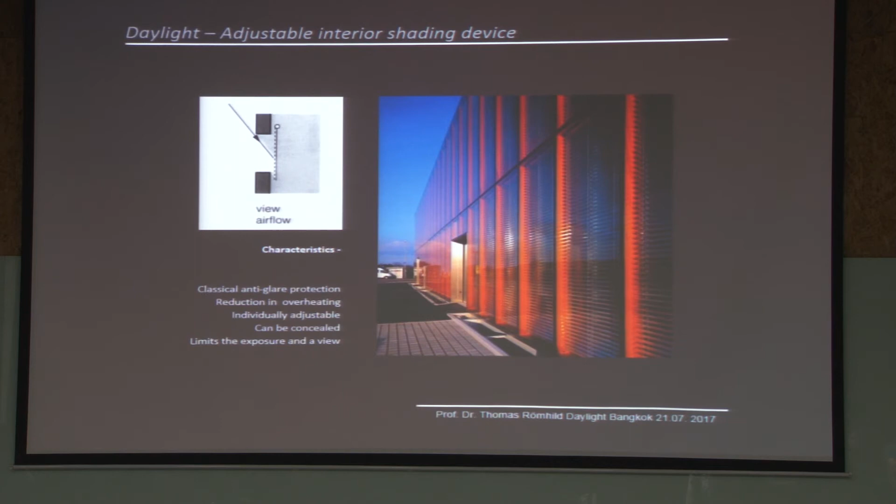These shelves could also look very sophisticated - they could be glass, or formed in metal. You could have a shading device interior or in between the glasses, so it's cleaner from outside, or a shading device which is not stable enough against the wind.

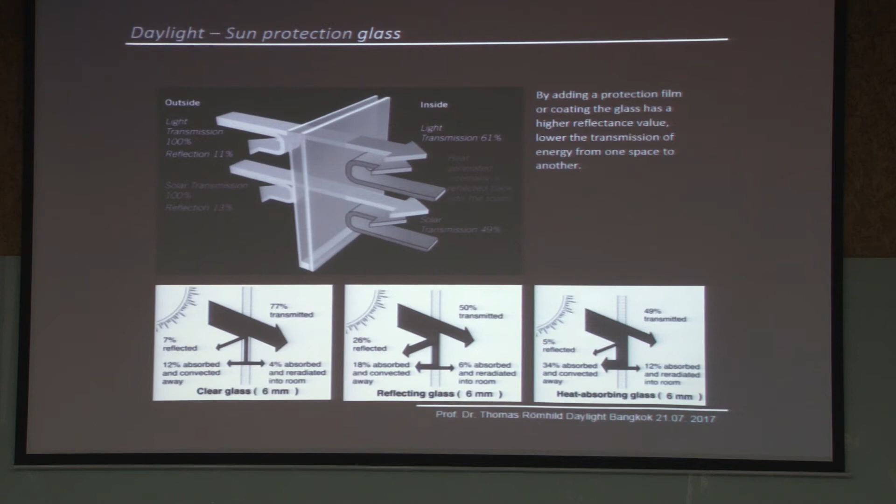And you can use sun protection glass - I've talked a lot about this. It has to be selected very well, and in my opinion it's not the first solution, it's the last possibility if you have no other options.

Then there's the possibility of double glazing with shading in between. You can also have interactive systems where everyone can open or close the window as they like.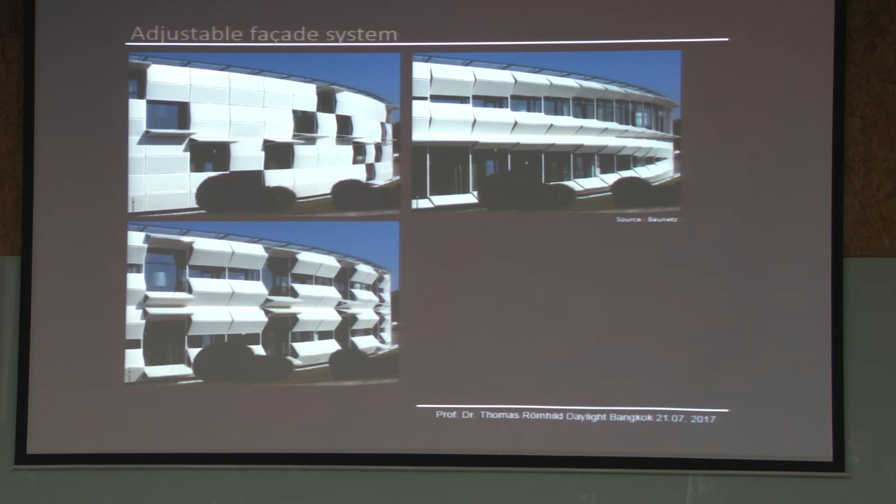It could also be structuring the facade in an interesting way, programmed so the form of the building changes according to the sun level. I'm not so sure whether this is a solution that should be done everywhere.

To summarize these systems, I'm not showing things like we find now in Dubai, very sophisticated systems, because I think the question is always: do we need a system? Wherefore do we need a system? And isn't it better to design the architecture first, before using help systems, in a way that the light is respected? I'll have a short look through the history and then show you two examples, and then I'm ready.

In medieval times the windows were small, and in the period from around the 18th century to the early 20th century, buildings were still organized with a corridor that was daylit, and all the offices were daylit too.

This is a typical office building, and even the central hall was made with this fantastic tower so that it is daylit. There's a little bit of decorative artificial light, but no real artificial light is needed.

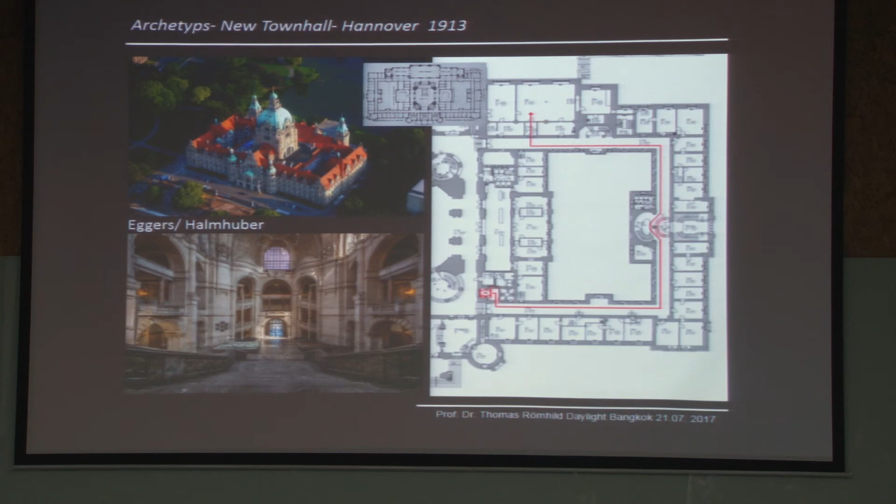But because of technical evolution and technical possibilities, architects were thinking more and more that we don't need these daylit parts, and I think this is the wrong direction.

In the Bauhaus, they were still very daylight-orientated. They opened the building - it's debatable whether that produces a good climate, I would say no - but they opened the building and had the possibility of daylight everywhere. Even the corridor is somehow daylit.

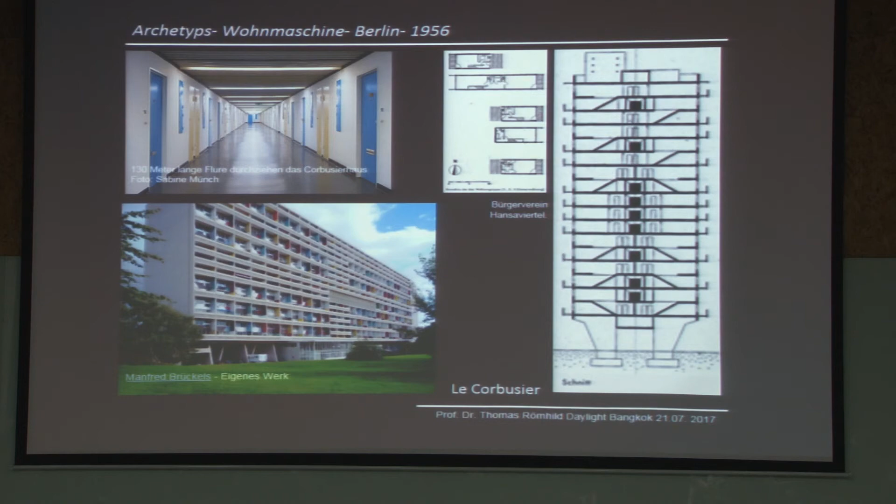Then famous architects, among others, decided it's also enough to have a dark corridor. Here there's no window at the side - the corridor is totally dark, totally artificially lit. This was from 1956. There was a trust in electrical energy and also in electrical light sources. So what does this mean?

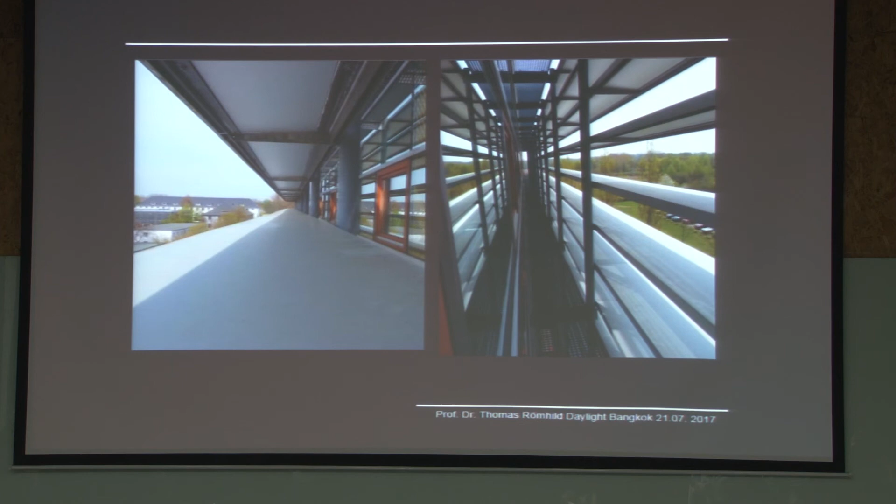I have talked about this already. This is our architecture building, which should be an example for modern and good architecture. What did the architects do? A 100% glazing facade to the south—more than 3 times what is recommended, as we saw in that recent research I was quoting. So they had to do something, they had to bring this shading in front, 50 centimeters wide and 50 centimeters high, with a possibility to look out.

It's not so bad. Here you can see how in March the sun moves around, and it's not really the south position, so the sun comes deeply between these shelves. But even if it were the south position, you can see that above 45 degrees the sun is excluded, because if it's higher, it's reflected from this system. Only if it is lower does it come into the room.

But what you can also see easily is that between 9 o'clock in the morning, the whole time between August and April, and also here in the afternoon, the shading is not working. Only in the high summer season, in these two months, does the shading work during working hours. This means our building is normally too hot, so we open the window. And because it's also the heating period, the heating is switched on while the window is open, so we have high energy consumption in this building—unwillingly, because the architects did not think this problem through to the end.

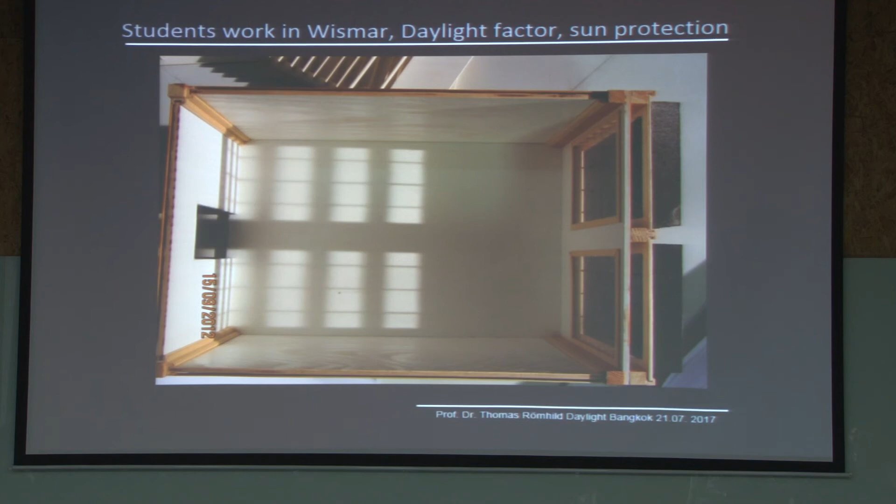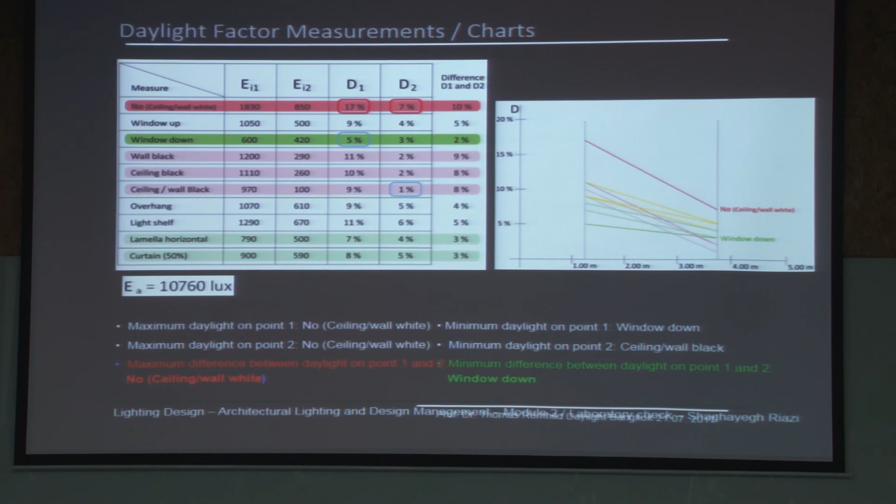To teach this, we have a light lab, and in this light lab the students do experiments, finding the influences of the daylight factor and of direct sun coming into the room, causing problems of glare and overheating. Then they get results like this where they can understand the needs of architecture better.

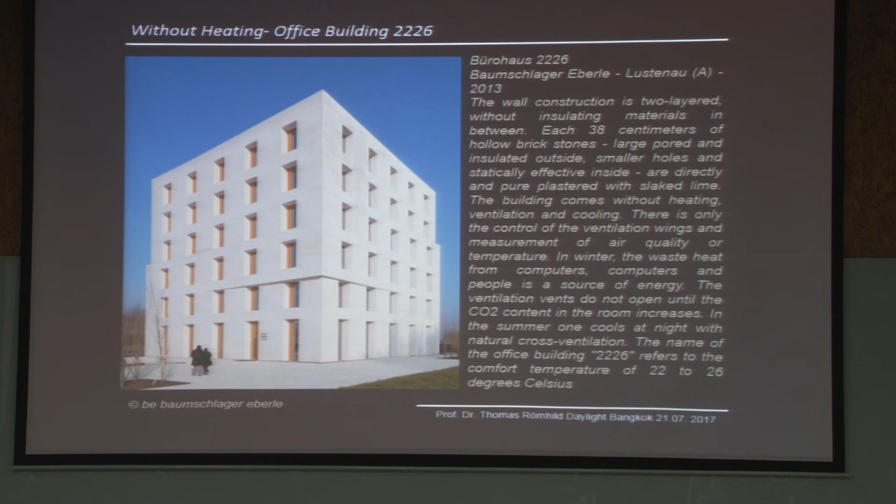This is a very interesting building in Vorarlberg, from Baumschlager Eberle. This building is not heated, even though it's in Austria, in the mountains, where it's cold in winter. They achieve this by having an appropriate number of windows in all directions, so they can get diffuse skylight from everywhere and capture energy when needed. And if it's too much during summer, there's an automatic system that opens the windows so fresh air—a benefit of our region—can flow through and cool down the building.

In winter it is so well insulated, and enough sun comes in, that the interior heat from people and machines is enough to keep the building warm. In between—and this is the name of the building—the temperature ranges from 22 degrees, the coldest, to 26, the warmest. The trick is that it's an open building, and the ventilation can flow through everywhere, so if heat is produced here, that heat can be used in this corner too.

Next example I want to show is a museum, traditional forms of museum lighting. I want to mention this museum, a small museum in Ahrenshoop. Ahrenshoop has an art tradition, and they wanted to have their own museum which looks like small buildings. They wanted to have the possibility to bring in light in the top, and the rest is closed. So what happens inside?

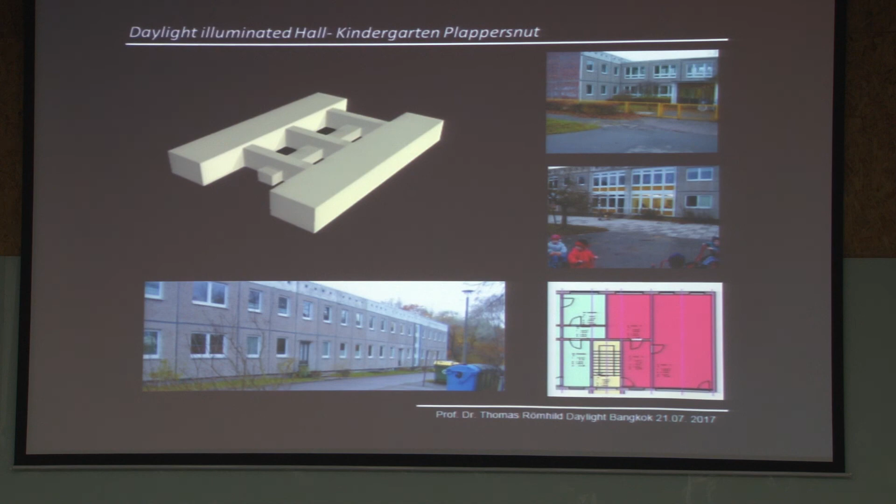So there was a lot of heat loss in these corridors. They were only glazed, and it was really difficult to heat up this building. A very easy solution for that: we thought, okay, we want to cover it all to make the walls smaller.

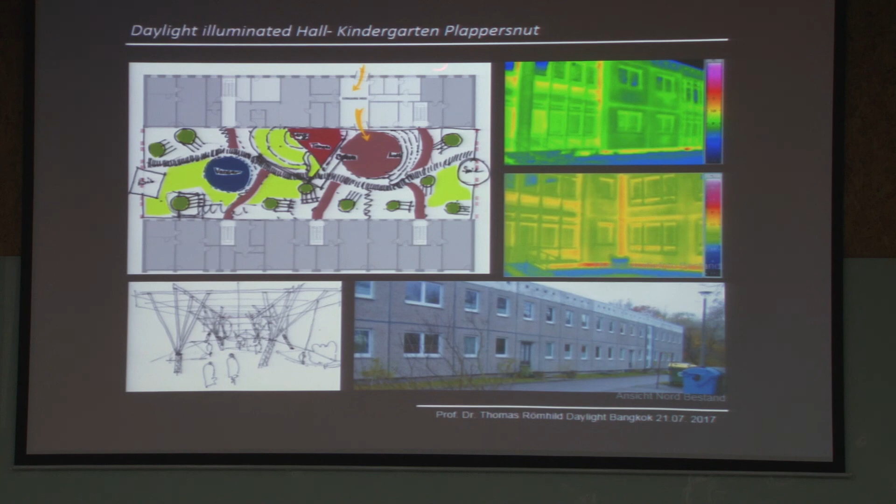Here we have a new interior. We don't need insulation here; we have insulation only on the outside walls. We can repair the heat losses with a system, with a hall we can add here, which also gives more playground for the children. You can see that this factor, showing how many walls you have to the outside, is decreasing.

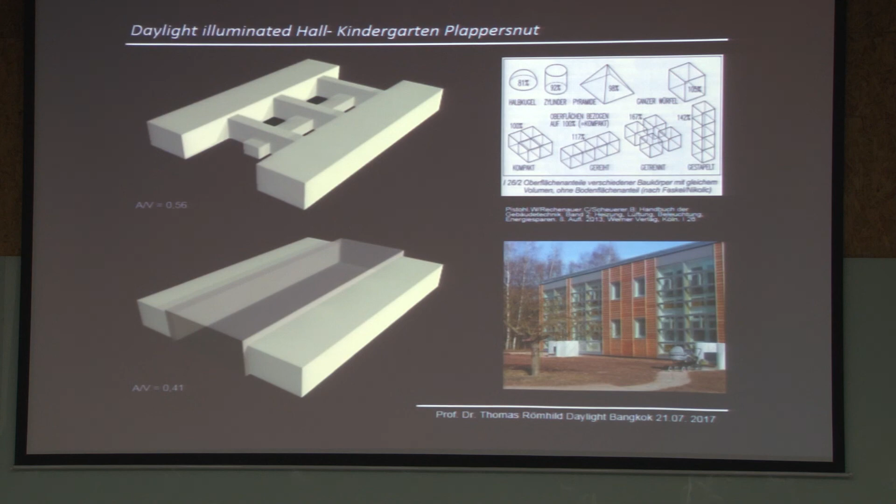This is the hall, how it looks like, and the system is that in summer the air is going from the building through to the outside to cool down the building. During summer days there are more openings so that the heat is not coming into the building anymore, and in winter the heat from the hall is going into the rooms, and at night it is heated up by radiators. So a very easy system.

For the roof we selected this ETFE foil, which has the possibility of different shading options, so that if the sun is very strong it could close itself, and it could open so the sun can go through more if it is a diffuse day, or less sun in winter times where you need it.

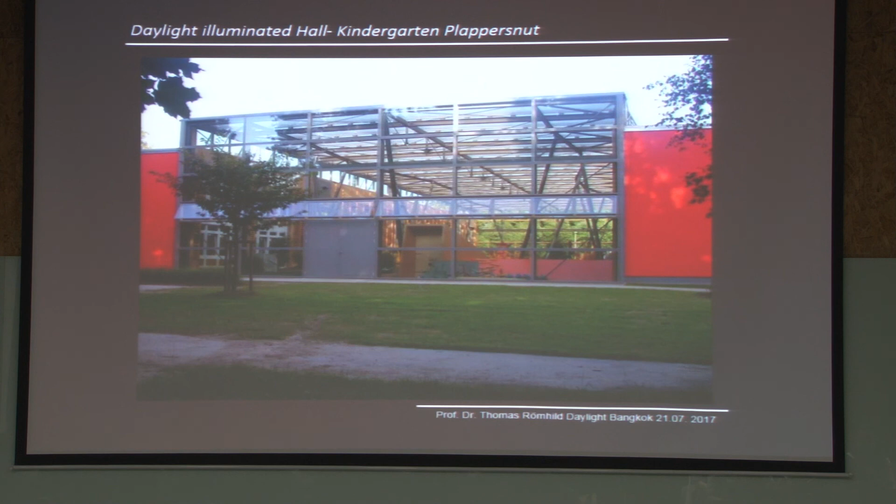So the effect is that the temperature in this hall is every time around 7 degrees higher than outside, only in summer it is open in a way that it has the outside temperature. It's then open in the roof and in the lower parts, so that there is the outside temperature. It's a well working system, and the children are enjoying this very nice new atmosphere.

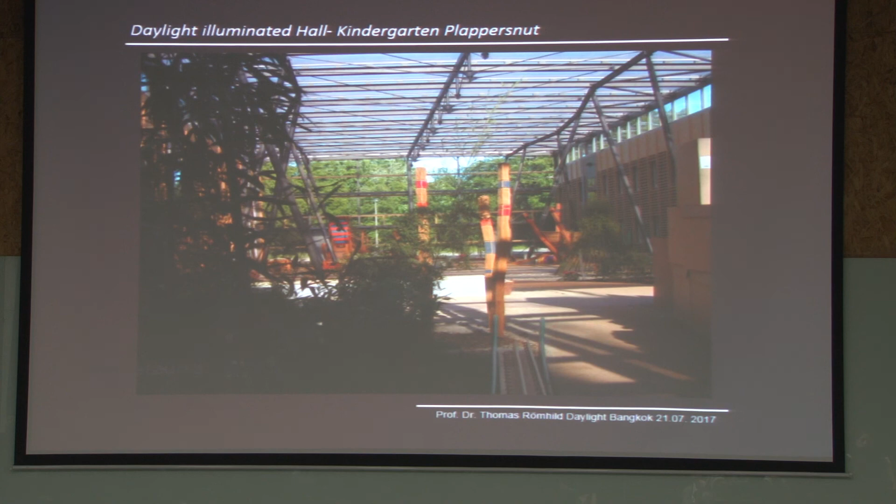So it is using the daylight for heating, but it also has the quality of being a day-lit playground, which is important for the pupils, for the children. The ETFE foil has the capacity to let UV light through, so some benefits of the daylight can reach the children, and flowers are growing and so on. Some more pictures, happy children.